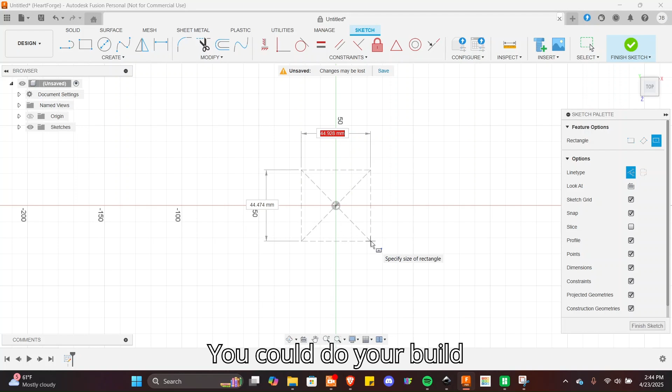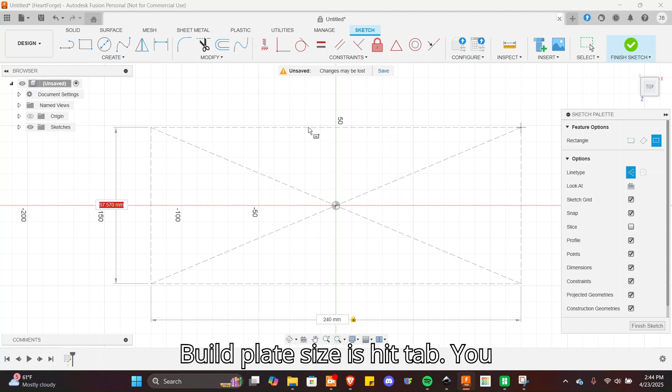Center rectangle, line type construction. You could do your build plate, build plate size, but you can go a little bit lower than what your build plate size is. Hit tab, you can go over to the other side, do the same, finish sketch.

Now you've got a sketch of the size of your printer build plate. Now what we can do, go to insert SVG, insert from computer.

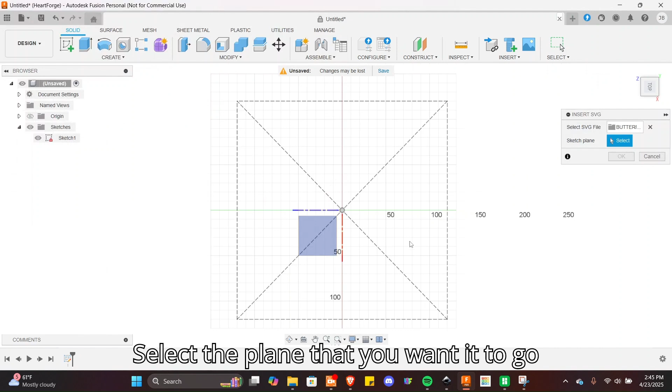Find your file, select the plane that you want it to go on. You don't want to click on your sketch you just did, otherwise it'll put it on that sketch. You want 2 sketches. So sketch number 2 is your SVG.

You can move it around, you can adjust the size. I'm just going to make it big just to show you the example. Hit OK.

Finish sketch. You can adjust your plane up here, the direction of it. You can hide your build plate now.

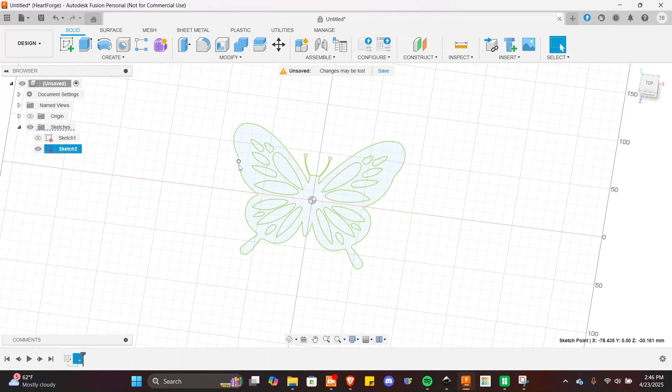So there's a few things you could do with this. Not click a corner, but you see how these highlight when you scroll through them.

So if you do that, you can extrude this to, let's say 2 millimeters, right? You could do a new body. Now you've got this SVG extruded.

This is already ready to 3D print if you wanted to. But you've got these holes as well. You can go back, not to that sketch, go back to this sketch, extrude again, and you can click all of these.

This takes a long time, depending on how much experience you have or whatever. This is just the way I do it.

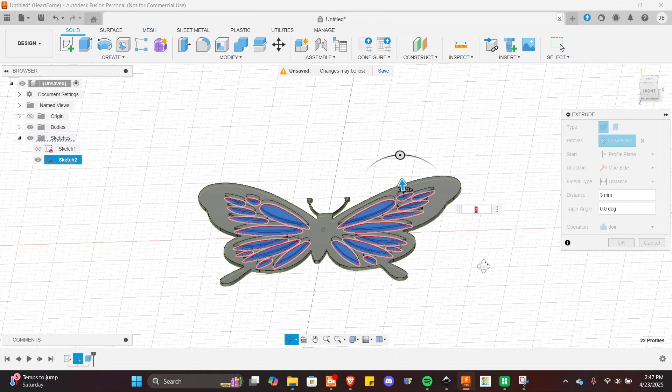Now, let's say you want this higher than your first extrusion. You could go to 3, let's say. And then join it if you want to. Now you've got a complete SVG with offset heights for the rest of the SVG.

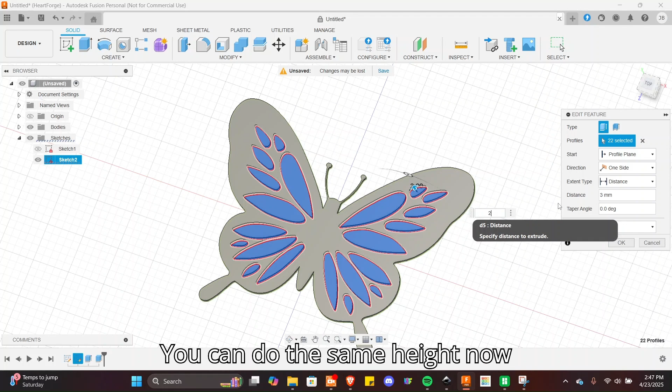You can go back in edit feature. You can do the same height now. And you can do new body. And you could change it like that.

Now if you hit A on your keyboard, you bring up colors. And you've got a bunch of colors now that you can mess with.

Duplicate, edit. Let's say you want, I don't know, what color butterfly we looking like? Purple. Then you want your other color to be black.

You can even drag and drop like this. There's all kinds of different ways to do this.

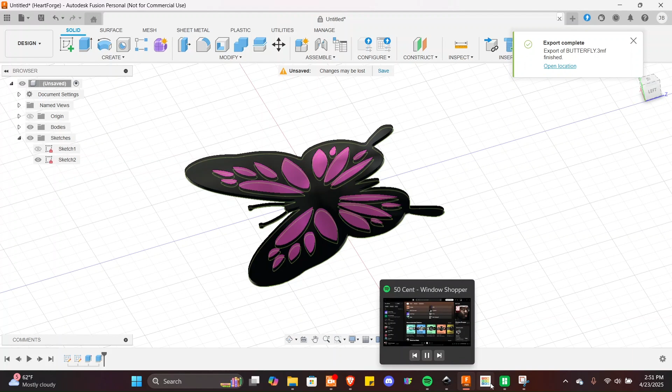Now you can go into Bambu Studio. Eventually. I've got too much stuff open. There it goes.

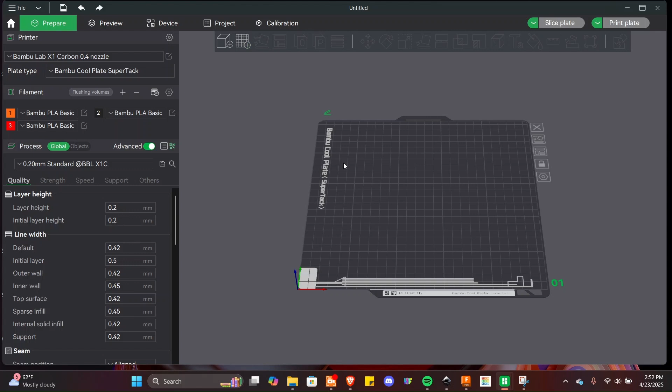Prepare and hit this window. Go back to the file you just saved. Butterfly, open it. Auto rotate.

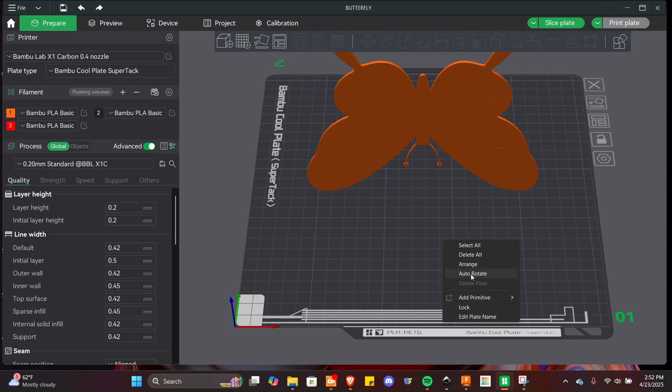You can change your colors. Just mimic the design you just did.

Now you go back in here. Oops, it was purple, right? You can just recolor it just like this.

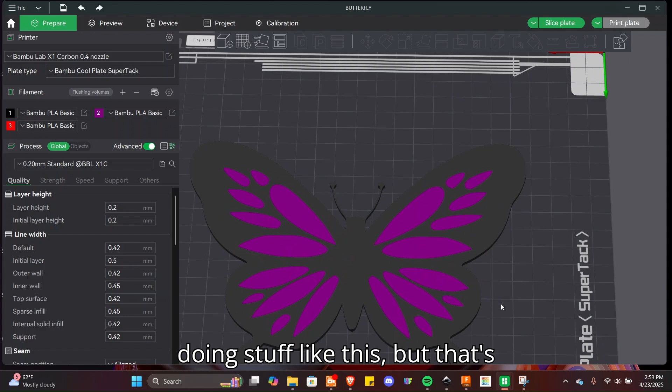And this is just a general idea of things that you can do in Fusion. You can make light boxes doing this. There's literally unlimited possibilities doing stuff like this. But that's just a quick example of something you could do. Easy peasy, lemon squeezy.